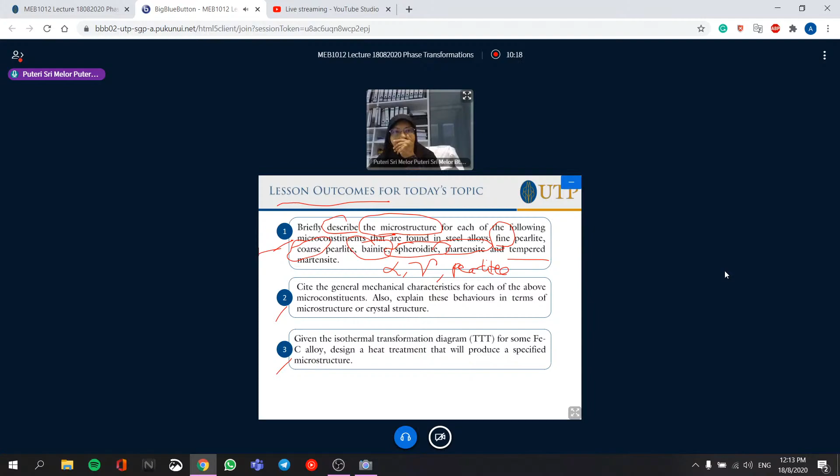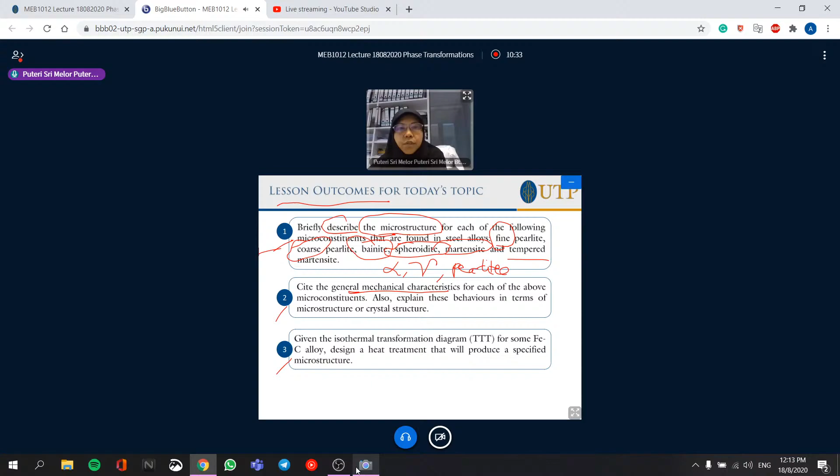Now we're gonna have fine pearlite and coarse pearlite, one fine, one coarse. And then we're going to learn about bainite, spheroidite. I think you never heard about that before. Then we have martensite, also tempered martensite. So we're going to discover this. You must be able to describe these microstructures, and then cite general mechanical characteristics of these microconstituents. We call them microconstituents because they are a phase, but they have different microconstituents. So you must be able to explain their behavior in terms of the microstructure or crystal structure.

And then this is the big thing: given the isothermal transformation diagram, which is quite a mouthful to mention. Isothermal transformation, or in short form, TTT. What does TTT stand for? Time, temperature, transformation diagram. So sometimes we call it isothermal transformation, sometimes TTT. For some iron carbon alloy, you need to be able to design a heat treatment that will produce a specified microstructure. This is your aim, your task at the end of the lecture today.

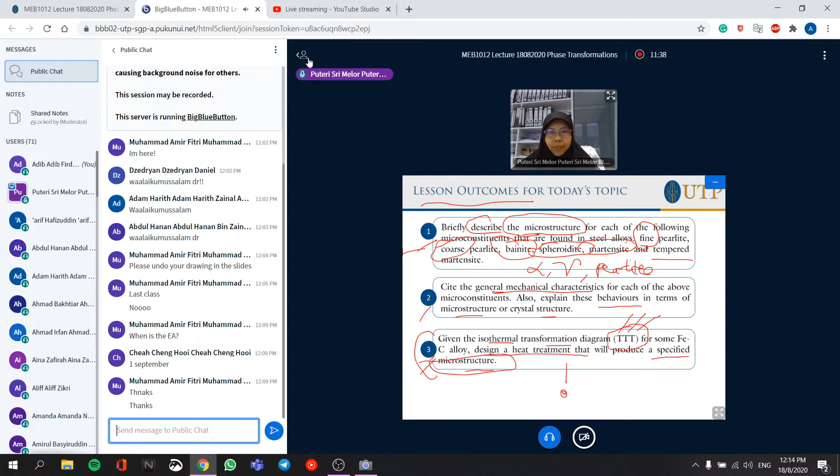How difficult could that be? No, it's not going to be difficult, but you have to pay attention. Where do we begin? It's always about where we are coming from and where we're going to, right? So here, we start actually with the phase diagram. This is where we are. We know something about phase diagrams; we learned this in the last chapter.

You need to know that the phase diagram is actually under equilibrium conditions. What does that mean? Equilibrium means nothing changes in time. No changes in phase development, no phase transformation over time. Everything is stable. That's what we call equilibrium. So the phase diagram reflects the phases present under equilibrium conditions. Reaching equilibrium is not easy, and it's not practical in normal situations in the industry or our daily life.

Therefore, there's something missing in this phase diagram: the factor of time, right? Because time is constant here. Nothing changes over time. So we need to develop a diagram that allows us to work beyond equilibrium, because reaching equilibrium takes a very long time, so it may not be practical. So engineers and material scientists came up with another diagram that tells you about the phases that are going to be present, but with the factor of time.

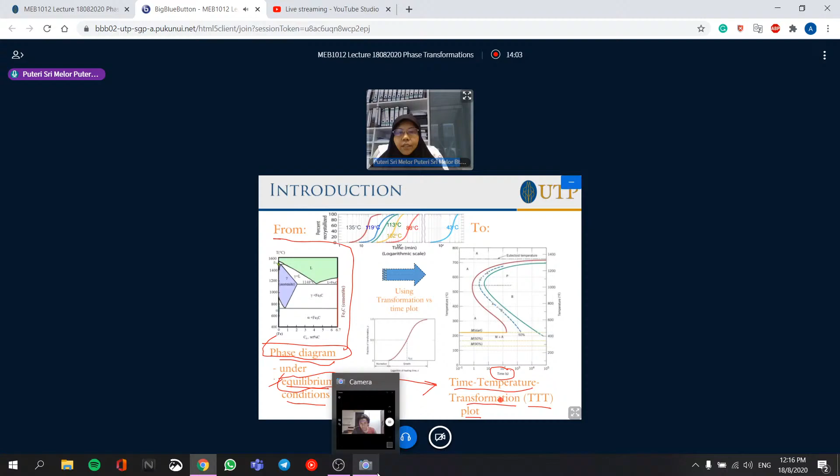So this is called the time, temperature, transformation diagram or plot. That's why TTT. So we move from the phase diagram, equilibrium, into something that has a time factor in it. With the time, temperature, transformation diagram, the time is there, but the transformation that happens here happens isothermally.

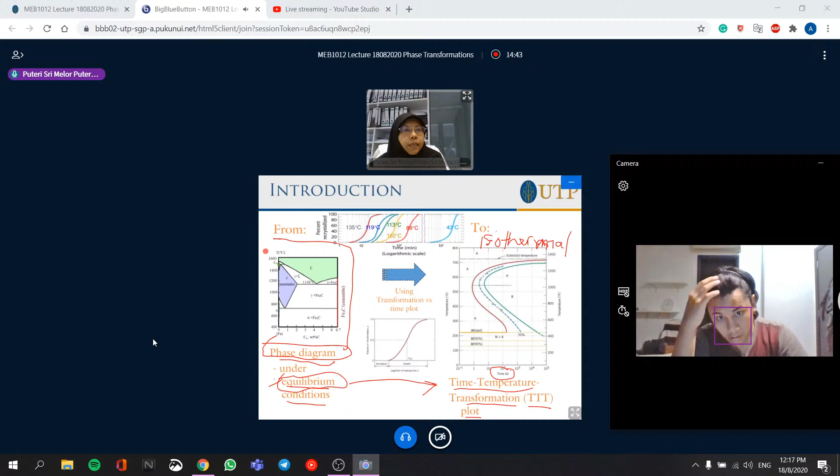So what is isothermal? Okay, anybody know what is isothermal? Kau ada boleh jawab kat sini? Okay, I'm looking at the chat now. If we know what is isothermal, anybody want to say? You can just type what is isothermal. No? No idea what is isothermal? Okay, temperature remains constant, correct.

All right, so in an isothermal transformation, you hold the temperature constant. So you can imagine that, like here in this diagram, this is fraction transformation, I mean how much your new phase is forming, and then this is actually time. So what happened is that initially nothing happened. You need to give some time for nucleation to happen. So this phase here is nucleation. You need to form small nucleus before a new big phase come up. Right? It all starts from a small matter.

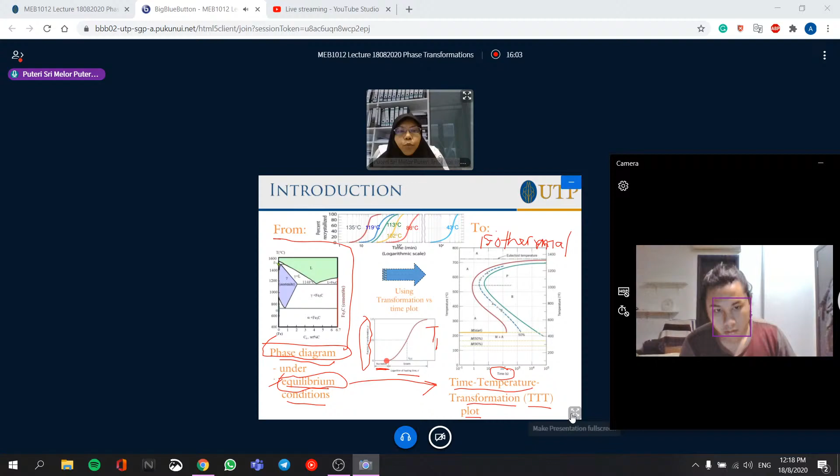So that nucleation will happen over time, and then it starts to pick up. Then now I'm going to have phase transformation, growing a lot more until I reach 1. That means 100% transformation. So this one happened at one particular temperature. So this is at T1. So we monitor the fraction transformation of the phase. We jot down when it starts, when it reaches the 50% point. This is 50% transformation line. Yeah, that's cantik. Okay, 50%. And over here, you reach 100%.

All right. So you do this for all temperatures. For example, here they show 135 degrees, 119, 113, many different temperatures. Each one is happening at isothermal temperature, so one constant temperature. So you maintain your temperature and then you observe nucleation happening, and then you start to grow your nucleus into a phase, and then let that phase grow until completion. So that is what isothermal transformation is all about. So finally, engineers come up with this diagram from this single phase transformation diagram. So that is just to introduce you where we are coming from and where we're going to. So this is the diagram we're going to work in chapter 10.

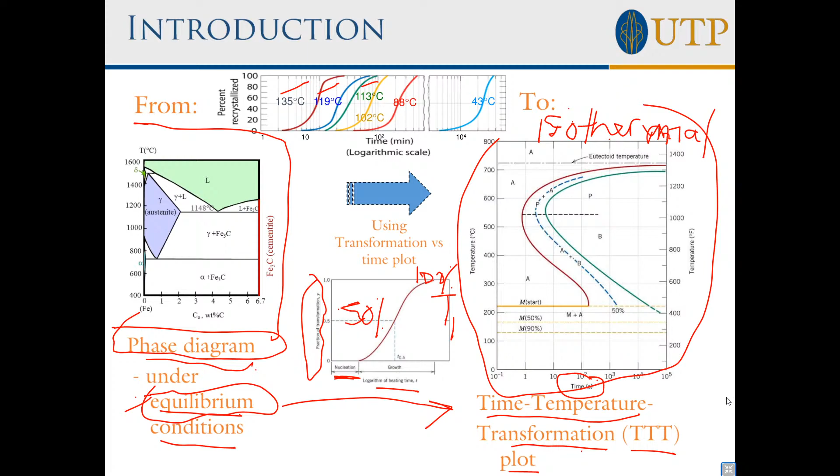All right, any question? Anything that you want to ask at this point? Okay, so kalau nak tanya, you can write. I'm waiting for your question just to clear things before we move. Clear for now? Okay, good. All right, so now let's move to the next slide. Okay, I'll try to be fast.

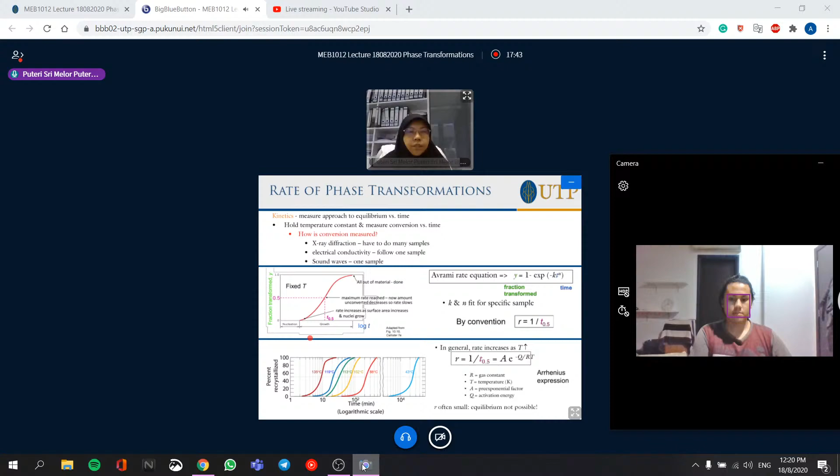Okay, so this is again the plot that I showed you earlier. This is what we call phase transformation ataupun rate of reaction. So this is fraction transform. How much? So in terms of fraction, it's 0 to 1. Ini adalah fraction. Fraction adalah from 0 to 1. I can convert this into percentage lah, 0 to 100%. So as I said just now, initially you don't see anything because nucleation is happening. No new phase is coming up.

This phase is just like human being lah. When we come to the world, we didn't start off like a big baby, you know. We start off as a drop of liquid and then develop into blood and then develop into flesh and so forth, right? So this is the same thing happening to phases. It started with nucleation and then it starts to grow. So this is where you start to have your new phase coming up. Here is the midpoint where you have 50% conversion, and then at this point it's 100% conversion.

So your rate of transformation, rate is over time lah. When we call rate, that means it's over time. So the rate is actually the slope of this curve at 50% conversion. That is how we define rate of transformation. And this is following Avrami rate equation, where fraction transform y equals 1 minus exponential of minus kt to the power of n. So this is how you calculate amount of new phase coming out. By convention, rate of reaction is the inverse of the time required to reach 50% conversion. So that is the rate of transformation.

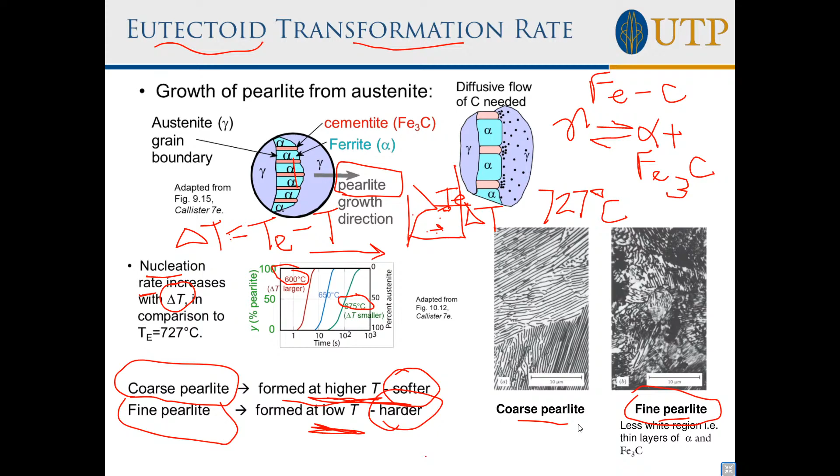So how do we get coarse and how do we get fine? It depends on the temperature of transformation. Okay, let's move into the next slide. I think we can see here. Okay, so what happens when T is way below TE? This is like 600 degrees just now. Okay, delta T is very big.

When delta T is big, your nucleation rate is high. And because temperature is low, your growth rate is low. Therefore, you get lots of nuclei, but they don't grow big because temperature is low. Movement is a bit slow, right? Compare to temperature just below TE, that means temperature is high, 675. So delta T is small.

Over here, delta T is small because it's close to TE. Nucleation rate is low because nucleation rate is proportional with delta T. And because the temperature is high, growth rate is high. Therefore, not many nuclei will come out, but they will grow big. So you're going to get coarse pearlite in this case, and fine pearlite in this case. And the one in the middle is moderate.

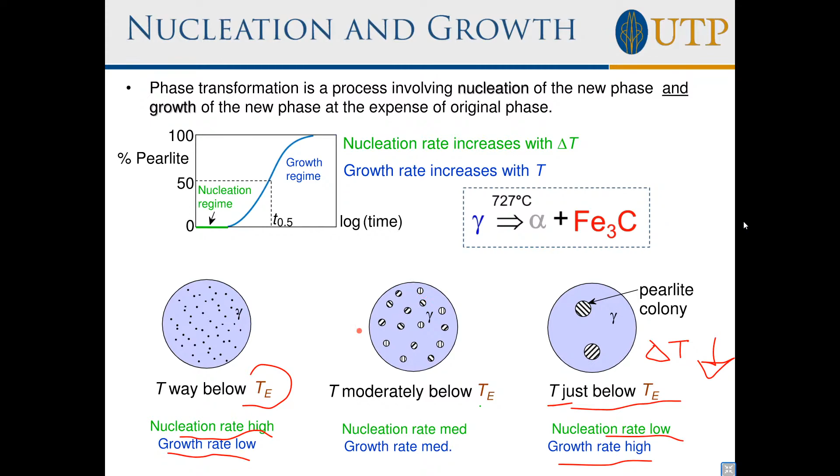So this is what happens as you isothermally transform it at different temperatures. Before, we didn't talk about different temperatures because it's already at equilibrium. So now you realize that you can play around with it. You can transform the pearlite at different temperatures, and depending on the temperature, you're going to get a different microstructure. Okay, so any question?

Let's see whether you have any question. I'm looking at the chat board now. If you have any question, because it can be a bit high level, lots of concepts there. So I hope you can later watch the video to get a repeat of the method. All right, somebody is typing, let's see what the question is.

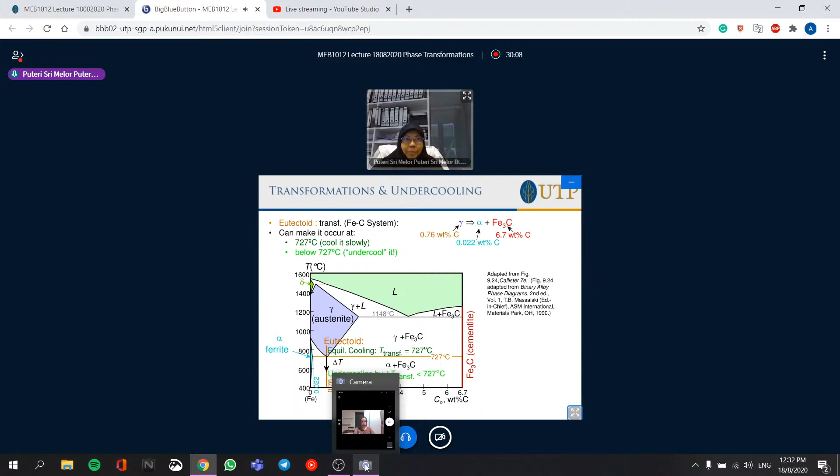TE is eutectoid transformation temperature. So this is eutectoid. TE is referring to this temperature, this line, 727, that is the eutectoid. Why are we referring to this temperature? Because we are only interested in the transformation of austenite into alpha and cementite, at this point, for this composition. That is the eutectoid composition.

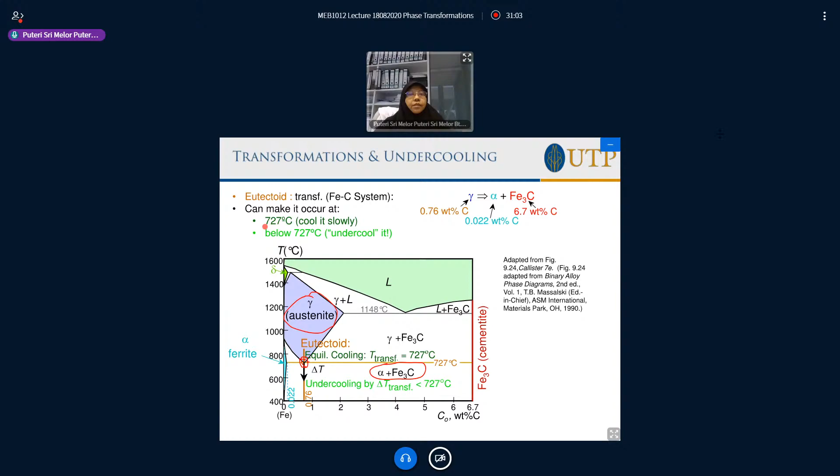This is eutectoid temperature. So we only focus on this composition, not any other composition, this particular point here. You need to understand that. Under our isothermal transformation, we are not cooling it slowly for equilibrium, we actually undercool it. So transformation is going to take place below 727. That's why we call it undercooling, where transformation is less than 727.

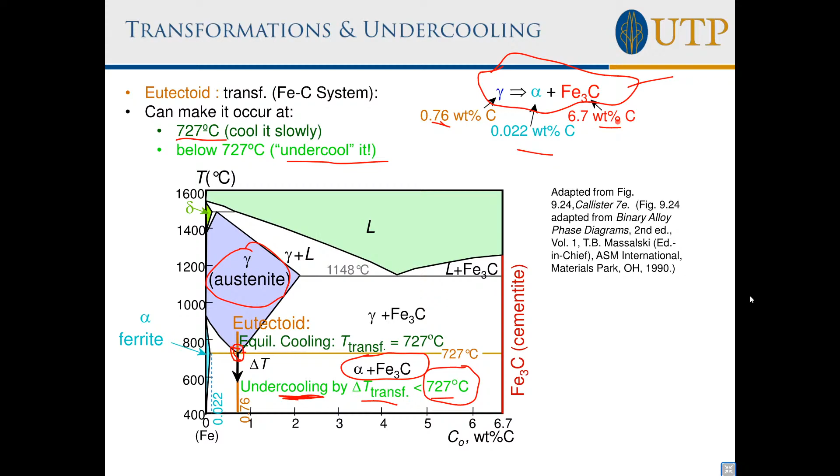At equilibrium, if you follow the phase diagram exactly, it only happens at 727. But now we cheat the system a little bit, we undercool it, and things will still transform. So this is the equation of the eutectoid reaction that we are focusing on. This equation you cannot forget. You should already understand this equation from the phase diagram. Those are just compositions of the phases present. Okay, let's move on, if that's all the questions.

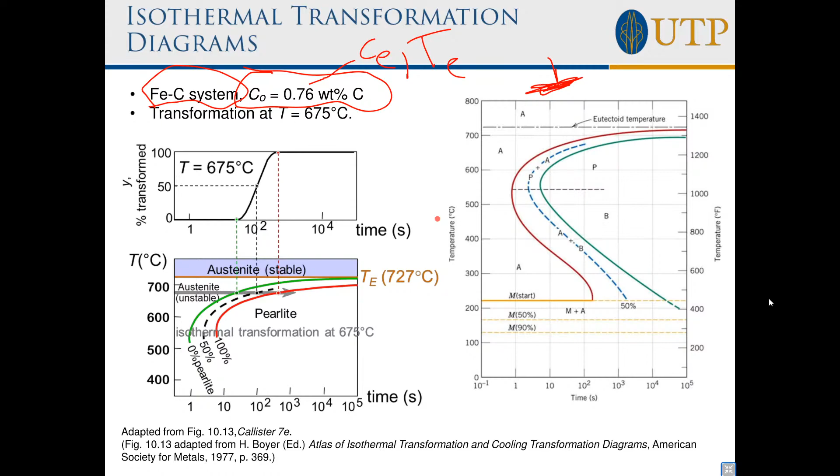For our phase diagram, you can see a whole lot of composition. But TTT is only good for a particular system. In this case it is iron-carbon, and it is for a particular composition: 0.76 weight % carbon, which reflects the eutectoid composition. So C_E happening at T_E. Kalau you lose that point, you lose everything. Okay, so I'm not going to repeat that.

Okay, now to continue on, just to look at the microstructure development, how we use this diagram. So looking at the top part of your TTT diagram, let's say you start with a higher temperature; you need to work above 727 in order to get a stable austenite. So let's say you start somewhere up there. And then you cool, you drop your temperature to 625 degrees, let's say. Once you get to that temperature, you maintain that temperature for a long time. What happened at this point?

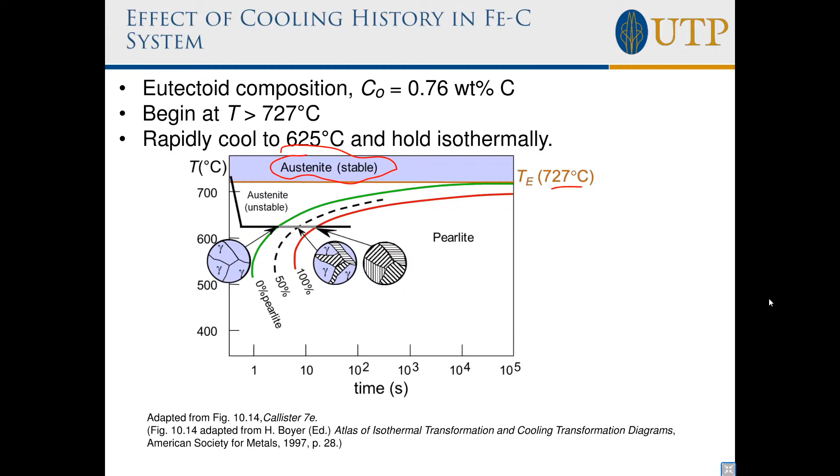Initially, you are 100% austenite, because this is just the start point of the transformation. Once you cross that green line horizontally, you get to the dash line. Now you start to get pearlite, 50%. So kalau boleh show by area, 50% pearlite, 50% austenite. If you maintain that for a longer period until you reach the red line, you have converted all your austenite into pearlite, all lamellar layers. Itulah yang berlaku. So this is the 0% pearlite line, this is 50%, this is the 100% line. Easy, simple if you understand. Okay, so you don't want to ask questions, let's just move on.

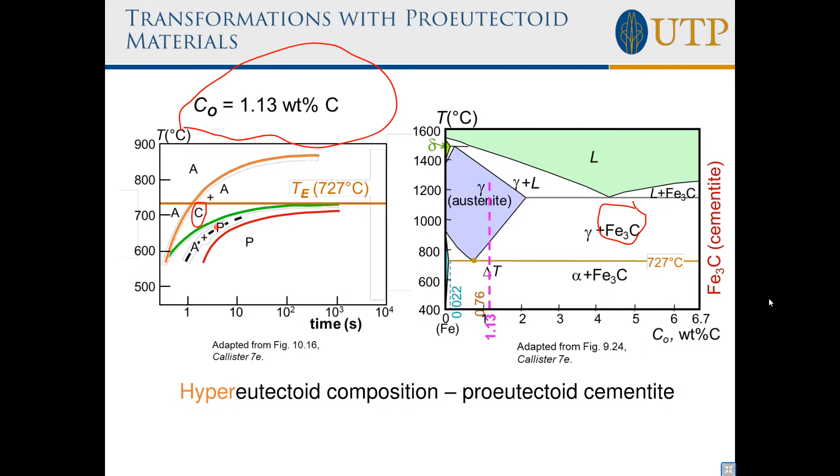This is to show you what happens to the TTT diagram if we move from the eutectoid composition. This is hyper-eutectoid, that means you are here. Hyper-eutectoid, you have the pro-eutectoid cementite. So the TTT diagram is now looking a bit weird. There is an additional line to show that you have your pro-eutectoid cementite. So tak apalah, I am not going to deal a lot with this as long as you understand the eutectoid TTT and know that it is all specific to certain composition. Different composition will need a different TTT diagram. Tak sama. Okay? Good.

Now, just quickly go through the non-equilibrium transformation products. Just now we called it bainite. Bainite looks like strips, with long rods of cementite. This is diffusion controlled because it needs time to form that microstructure. So bainite dekat mana? For bainite, you need to drop your temperature below 540 and then maintain your temperature long enough; you cross the red line, you're gonna have 100% bainite. So this is one heat treatment you can do to convert your austenite into bainite.

Spheroidite looks like this. As the name says, sphere. So they are round. Inside this, the round things are actually cementite and the background is ferrite. So you still don't run away from alpha and cementite. Everything is alpha and cementite. Only the shape, the microstructure looks different. Some look like plates, some like needles, some like spheres, particles. So don't confuse yourself. If you get that, that means you understand it well.

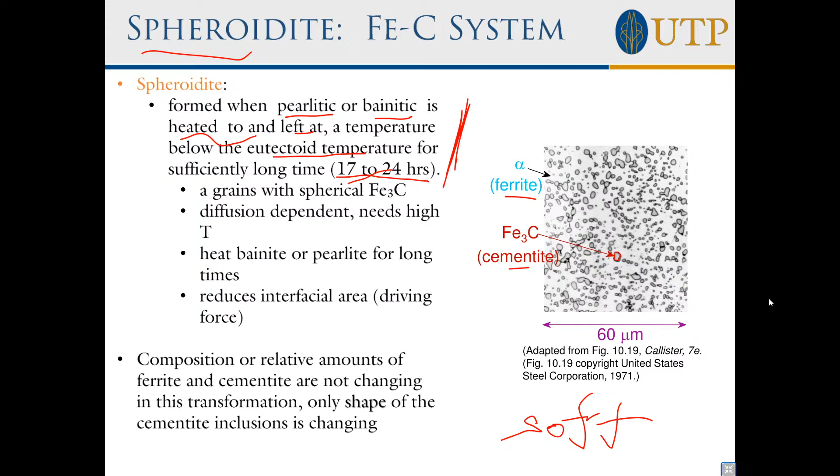Martensite, actually, it is conversion from austenite, FCC, to BCT, body-centered tetragonal. This is the crystalline structure, changing from FCC to BCT. It is involving single atom jump alone, right? So you can just imagine, the atom lompat keluar daripada position of the face-centered, and then they form BCT. So it doesn't require any diffusion because it's just jumping. So it is not depending on diffusion. It is rapid. Depends only on temperature. And this is the temperature. Okay. So that's martensite.

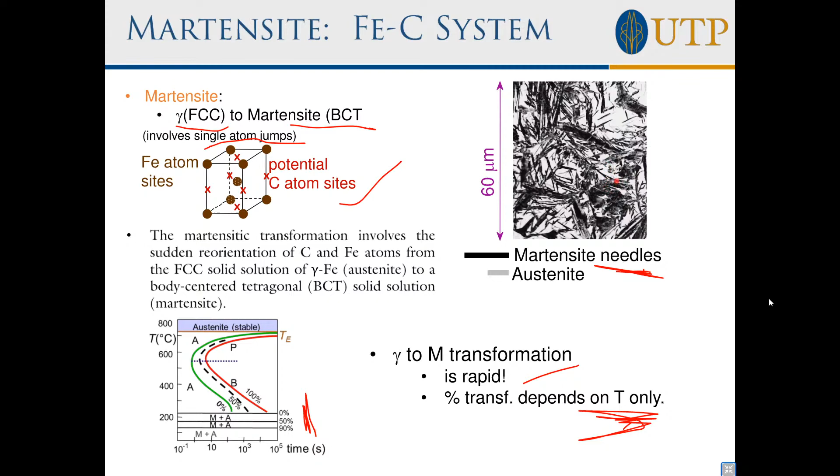Property dia, it is sangat keras. It is very hard. The strength is high and so forth. Right. So too much of martensite will not be good also because it becomes brittle. Okay. Alright. So ini apa? Sekejap. Let me.

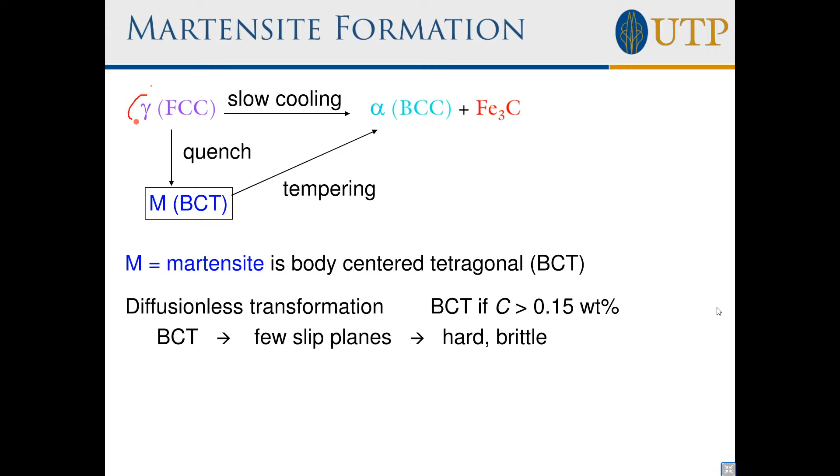Alright. So kalau kita boleh get back our notion about this transformation from gamma austenite, if we slow cool it, we're gonna have alpha and cementite in terms of pearlite, alpha BCC, and then if we quench it quickly, we will get martensite. BCT structure. And then we can temper it pula.

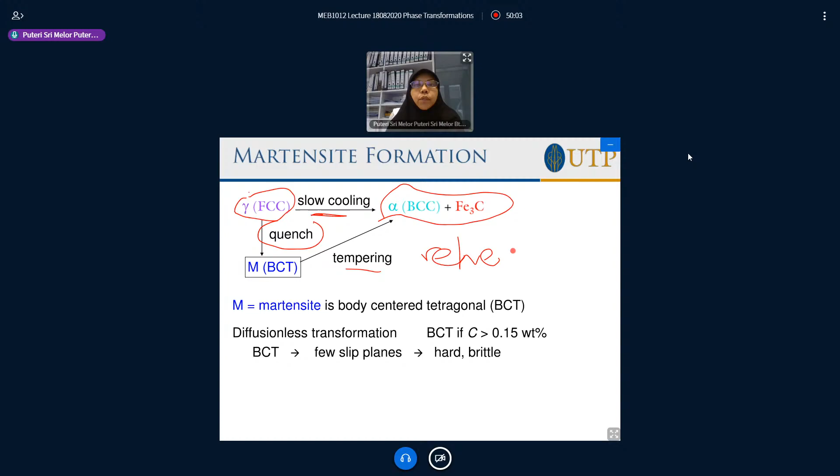Temper ni apa pula? Temper means you reheat. Tu sahaja. Reheat tapi below the eutectoid temperature. Reheat for a certain time, so you're gonna remove some of the hardness of that martensite, and then you create more ductile microstructure, right? That's why we do tempering. Then once you temper, we call it tempered martensite. So BCT, few slip planes, hard and brittle. Okay, that's the property of martensite.

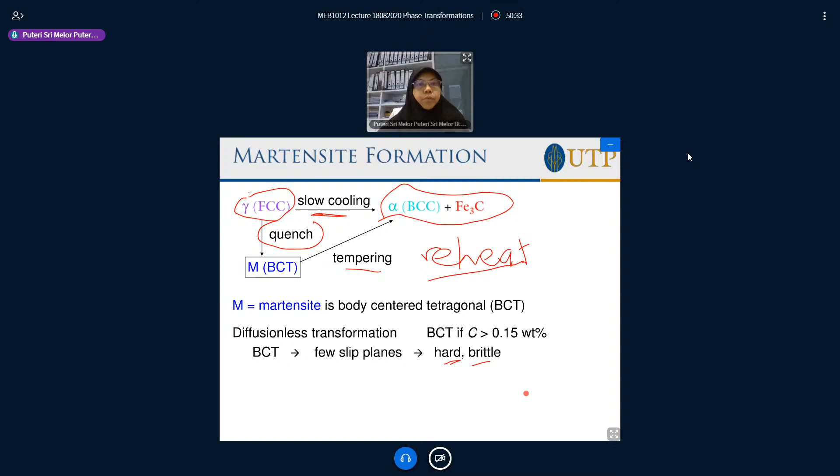Okay. Let's go to an example. Let me check if you have any question for me. Tak ada apa question, so must be crystal clear. Alright. So kalau ada question, just drop that.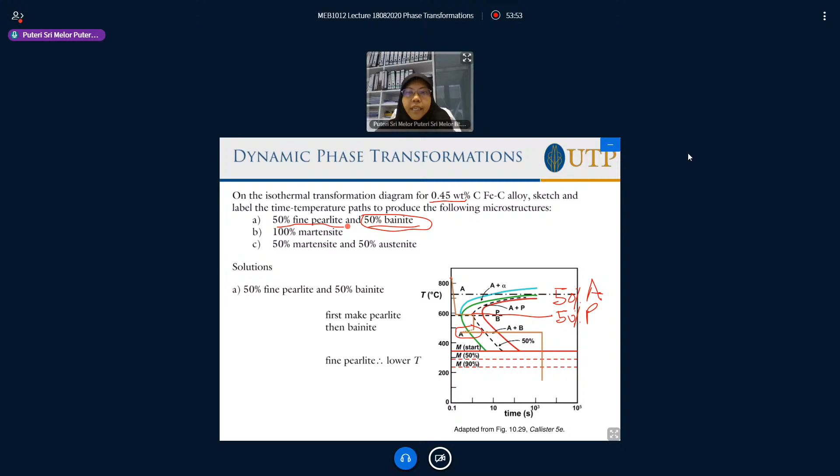If you stop in the middle here, only 50% out of your 50% austenite will change into bainite. So you don't stop here, you have to cross the red line so that 100% of your 50% austenite will change into bainite. Faham tak? And then once you have crossed that red line, you can stop there, you can stop here, doesn't matter where you stop, as long as you have crossed the red line, and then you have to quench to room temperature.

So then you're gonna get 50% dekat sini, you're gonna get 50% pearlite, 50% bainite. Itu saja. Ada soalan? Anybody not clear, you better ask.

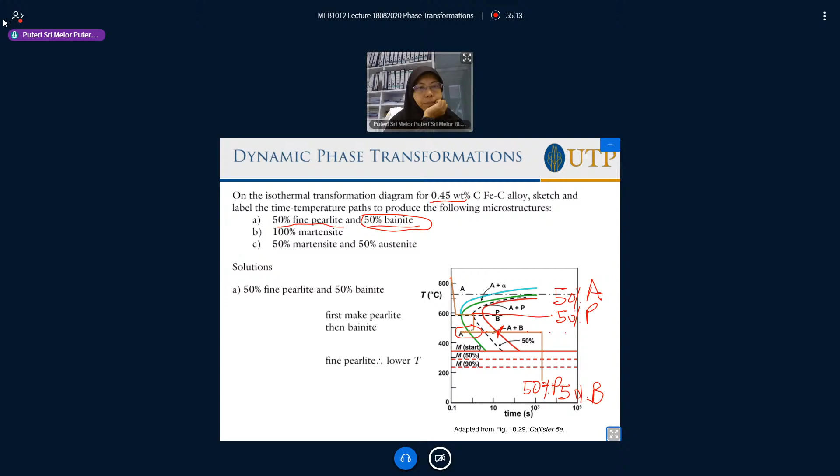Tak ada. Okay, you are not typing, that means you are good. Okay. Okay, type. Tak apa. You ask me because if you ask, then you clarify, then you understand, right? So I can see users are rising to 85. I hope you can just sign in your apps lah. Okay, your Power Apps to record your attendance, your final attendance for the semester. Okay. Apa soalan? Tak nampak soalan. Faham. Okay, good. Faham. Alright. Can I explain it? Okay. Okay, listen. Okay.

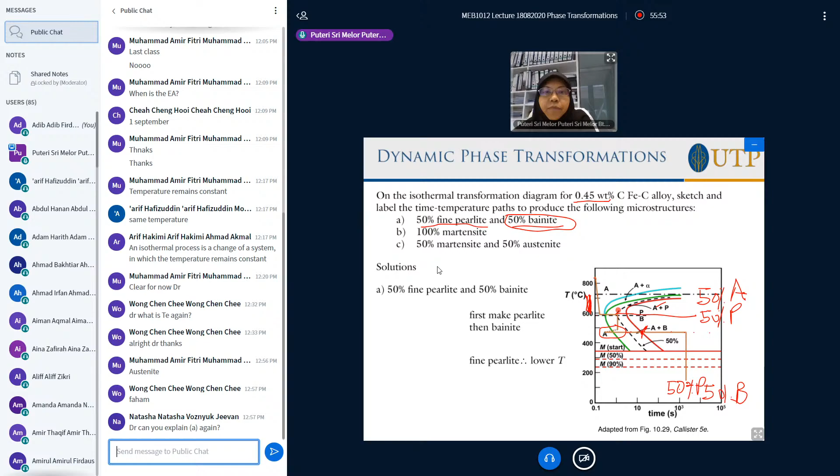How do you get 50% fine pearlite? Oh, dia ada cakap fine. Okay, fine pearlite and 50% bainite. If I want fine pearlite, I better remain in the pearlite punya region. So this is the pearlite punya region lah, between those two horizontal lines, ini dengan yang ini. Alright, so I have to remain there. If I want fine, I have to remain below, at a lower temperature. If I go to the upper temperature, I'll be coarse. So that's why dia letak kat sini very low, almost 600 there.

Right, and then drop your temperature from the higher austenite temperature, go down until you reach about 600, because that is where your fine pearlite will surface up, and then maintain that temperature until you reach the middle point. Middle point says you're gonna convert 50% of whatever austenite that you have into fine pearlite. Alright, so stop there lah, sebab that's what you want, 50% fine pearlite.

Alright, and the remaining, because you start with 100% austenite. When you reach the middle point here, this is the 50% conversion line. Therefore, you have reduced 50% austenite, dah jadi 50% fine pearlite, just because you hold it for a certain time at that temperature and you touch the dotted line.

Okay, then you drop your temperature, just drop, vertical line, and then reverse in terms of time, patah balik belakang in terms of time, because we want to start from zero time again. Okay, so ini balik zero lah, about zero. Alright, so you reverse in time, and this temperature is already in the bainite region. Okay, so what I do, I just maintain my temperature.

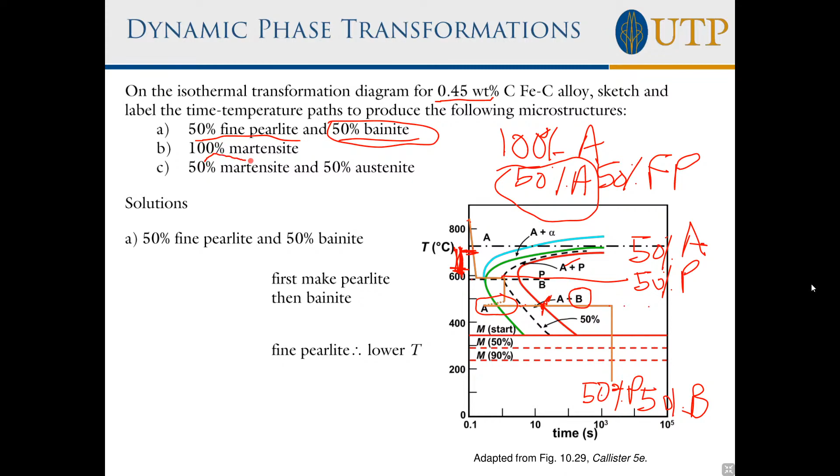Okay, let's look at 100% martensite. Martensite senang. Kat mana dia tunjuk martensite? Okay, sini. Martensite only depends on temperature. No need to talk about how long to hold. Martensite 100%, you still need to start from austenite. So you drop your temperature from higher above, and make sure when you drop your temperature... ni salah label ya. Martensite 100% is this, right? So you drop your temperature, do not touch the nose of this curve.

Once you touch the nose, memang kita panggil ni nose, bukan saya panggil-panggil saja, memang engineers panggil dia nose. Don't touch the nose, don't touch any part of the curve. Kalau you touch any part of the curve when you drop down your temperature, that means you're going to form into pearlite atau bainite. So don't touch them. Alright, you must keep away from the curve.

Okay, so you drop your temperature from higher up, straight line goes down here. That means you're going to have 100% martensite. Habis cerita. Alright, because martensite forms from austenite. So you drop your temperature, you tak langgar this curve, so tak ada apa nak bentuk, pearlite tak bentuk, bainite pun tak bentuk. Okay, hanya martensite because you dah cross the temperature where martensite starts to form. So kalau sampai bawah sini, you're gonna form 100% martensite.

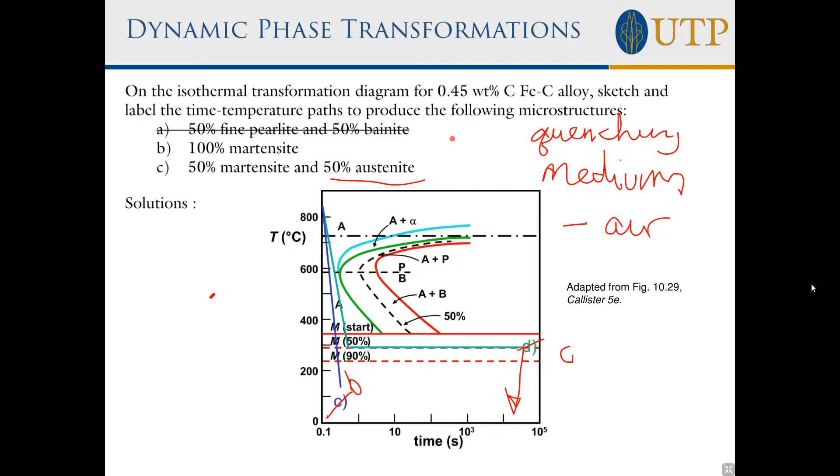Dia ada different medium. Ada yang guna air, udara. Ada yang guna water, air. Ada yang guna oil. So macam-macam. Alright, ada different cooling medium. So kalau water is the fastest, so you will avoid because memang boleh buat cepat. Dalam masa 1 second boleh buat. Okay, it can be done. Okay, alright, good question from you.

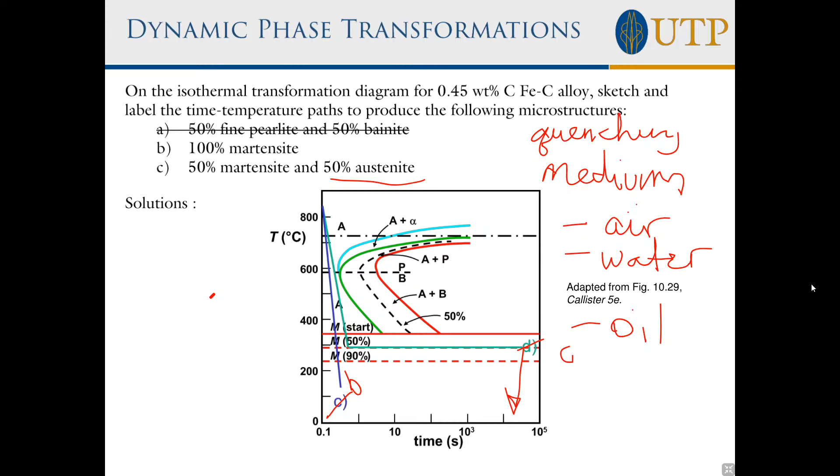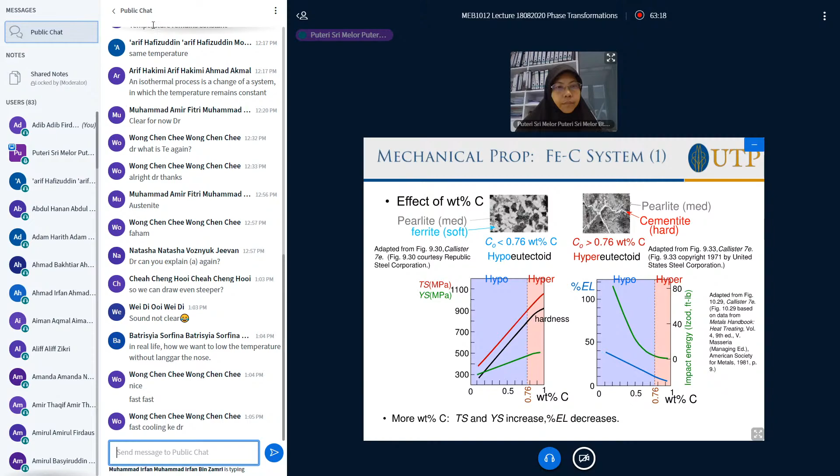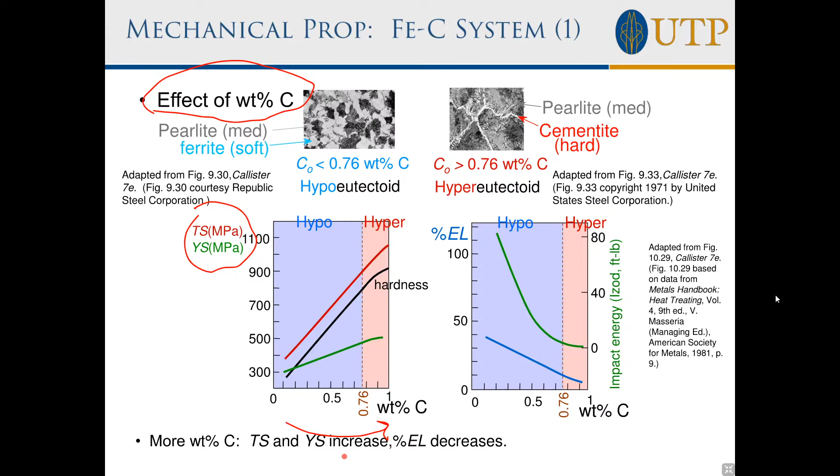Alright, okay. So kita ada sikit sahaja lagi kita nak cakap pasal mechanical properties. Tadi pun dah sebut pasal mechanical properties, but kita always relate microstructure dengan mechanical properties. Right? So over here you can see the effect of weight percentage of carbon. The more carbon that you have, okay, what happens? Your tensile strength and yield strength increase. Okay, they are all in the same direction. Tensile strength, yield strength, and hardness. Kalau in terms of elongation, you know it is the opposite of all this strength, right? So that's what happened. Kita dah cakap pasal benda ni, we know that.

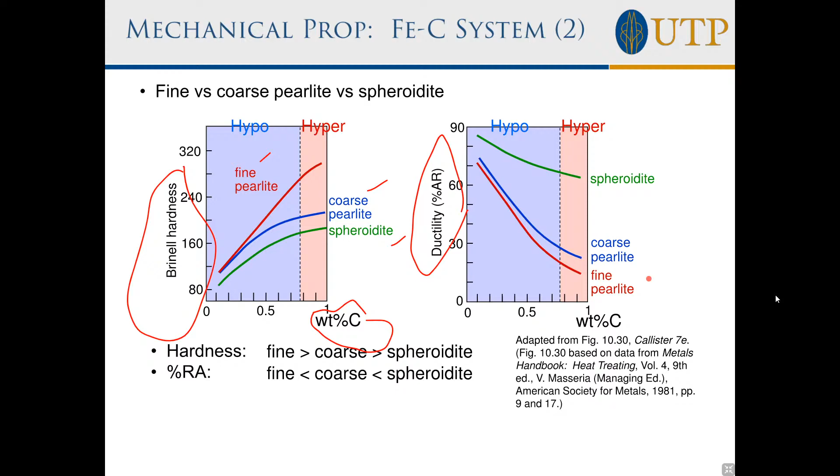Okay, so you have everything in the plot. So you can see the effect, the influence of amount of carbon. The more carbon you have, the higher the hardness and the lower the ductility. Good, right? So mudah sahaja. Now, if you compare, tadi kata fine pearlite is the hardest, the most strong. Okay, how is it compared to martensite? MashaAllah, very big difference between martensite and fine pearlite. So martensite is super hard compared to fine pearlite. That's why if you got too much martensite, you're gonna cause the material to be brittle. Okay, so not so good.

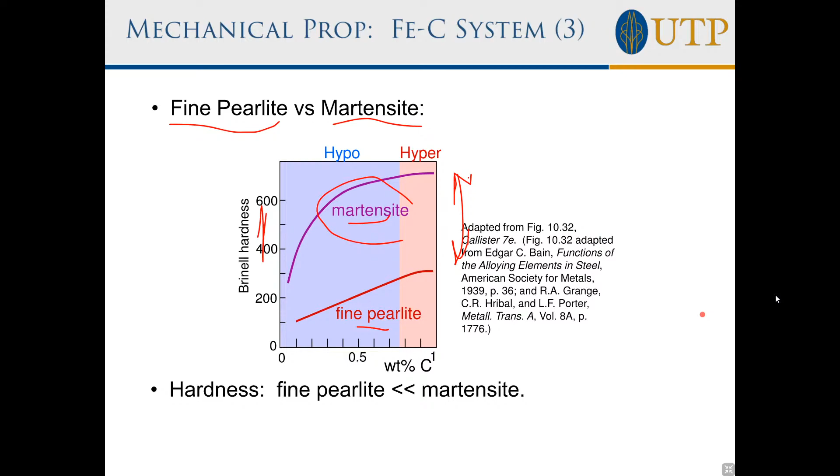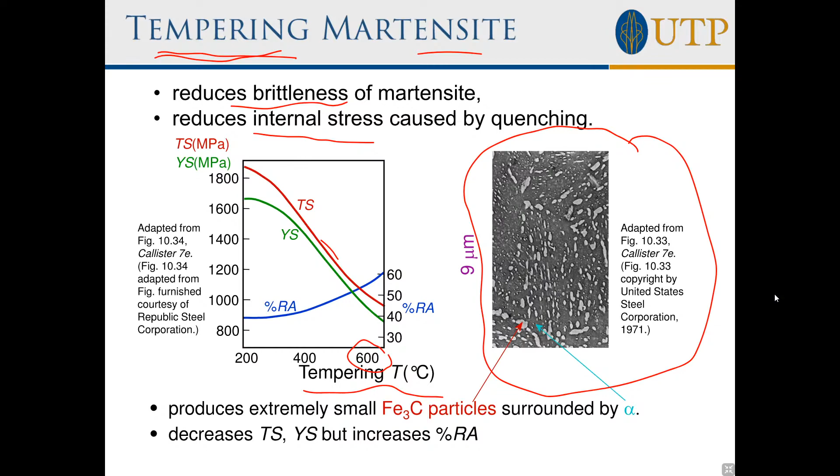So if you temper it at higher temperature, 600, below eutectoid temperature, what happened? Tensile strength reduces, yield strength reduces, your reduction of area or ductility increases. That's what happened during tempering. Subhanallah, all these things, engineers are having the knowledge how to change the properties of the materials.

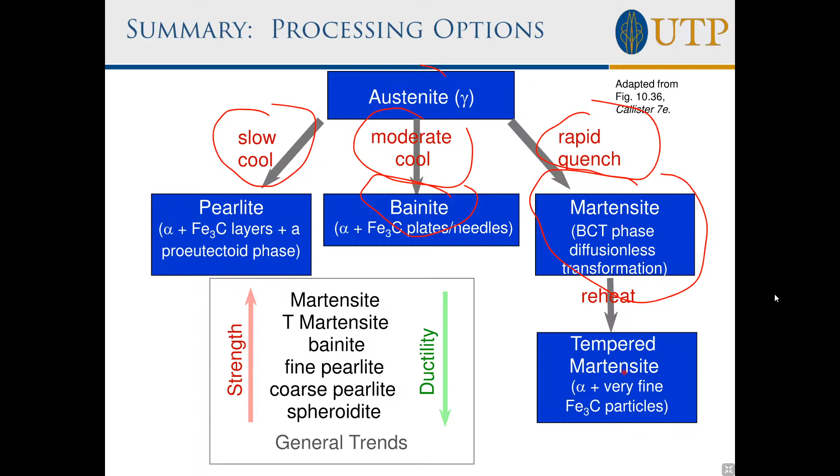Okay, so this is actually a summary of everything that we discovered in this lecture. We convert austenite into pearlite, right? If we do slow cooling, we can get pearlite. If we do rapid cooling or quenching, we're going to form martensite, and upon moderate cooling, we can form bainite. So the microstructures, platelets, needles, they are different. And if you reheat martensite, you're going to have tempered martensite.

And in terms of strength and ductility, it follows this general trend. You start with spheroidite at the bottom, having the most ductility and the least strength, and then you move up the ladder to coarse pearlite, to fine pearlite, and bainite in between martensite and pearlite, and then you have martensite, the highest strength. All right, so that wraps it up nicely. So we are done for phase transformation.

Okay, so any question? I'm just glad, alhamdulillah, we have finished discovering about materials from chapter 3, talking about crystalline structures, perfect structures, and then we move into defects, and then we talk about diffusion, how atoms move, and then we talk about mechanical properties, about dislocation, and then we talk about phase diagram, and today phase transformation.

All right, so I hope you can appreciate the knowledge in material science, and I'm sure you will use, if not all, some of the information in your future classes and in your future career.